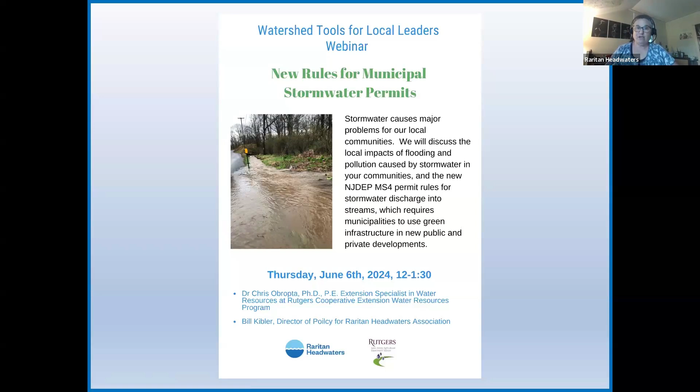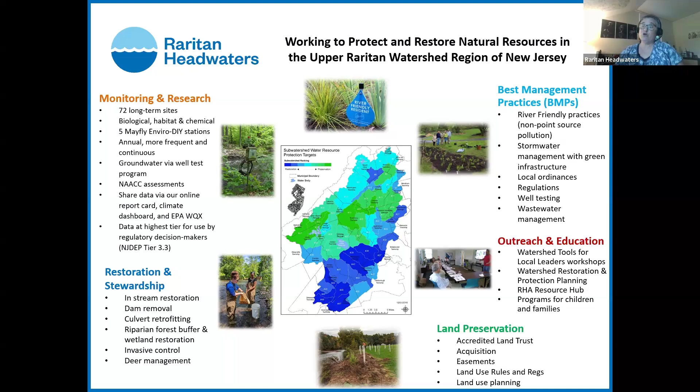My name is Tracy Gordon, Outreach Coordinator and Science Program Associate here at Raritan Headwaters Association. RHA is a 501c3 nonprofit conservation organization. Since 1959, Raritan Headwaters has focused on one thing: clean, safe water for all. We engage citizens and decision makers in the protection of our watershed and beyond through our award-winning science and education programs, land preservation, and advocacy. We are the region's leading provider of water quality research, habitat restoration, and water protection services. We preserve and steward critical watershed lands. RHA plays a decidedly unique role as no other organization offers a similar scope of services focused primarily on the Raritan Headwaters watershed.

We do have an upcoming watershed tools for local leaders coming up in September. There's the information, I will be sending more out. Our watershed tools for local leaders provides practical guidance on scientific principles, government regulations, and funding sources for watershed protection. These seminars are offered to decision makers and other stakeholders for 38 municipalities and 3 counties within our watershed area. Our goal is to provide expert level knowledge, practical information, resources, and partnerships to assist local leaders and citizens alike to make informed decisions to protect and preserve our water resources.

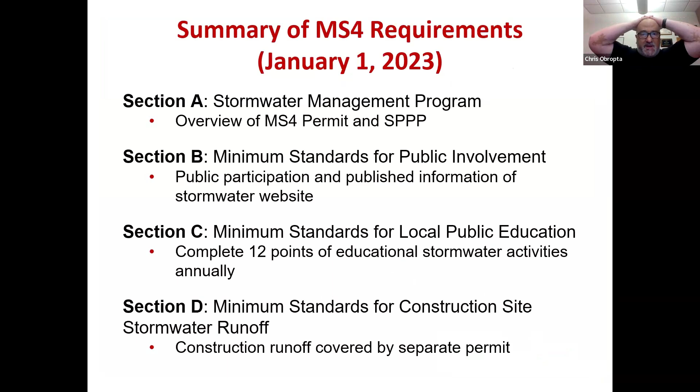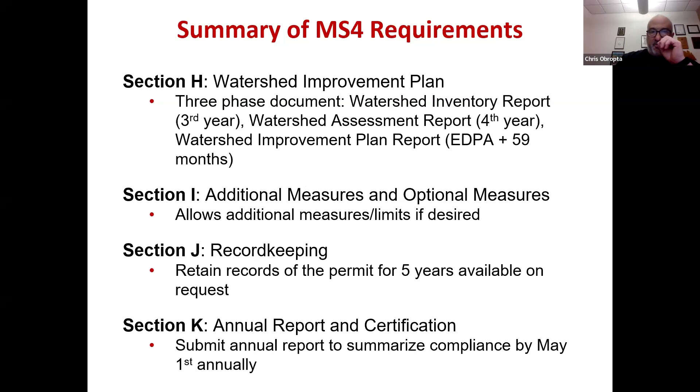So I'm going to go through the different sections of the permit. The permit came out January 1st, 2023. And we're going to march through each one of these briefly and talk about them. Some we'll spend a little bit more time on than others. And you can see, I'll probably just end at Section H, the Watershed Improvement Plan, which will be the last thing we'll talk about today.

So the whole idea with this is that every town in New Jersey has a permit for their MS4 system, and the MS4 system is the municipal separate storm sewer system, and that's where the four S's come from. And the idea is to really have a stormwater management program in a town that makes sure their systems are working properly as designed, that they're being maintained, and trying to remove as much pollution to the maximum extent practical as the systems were designed.

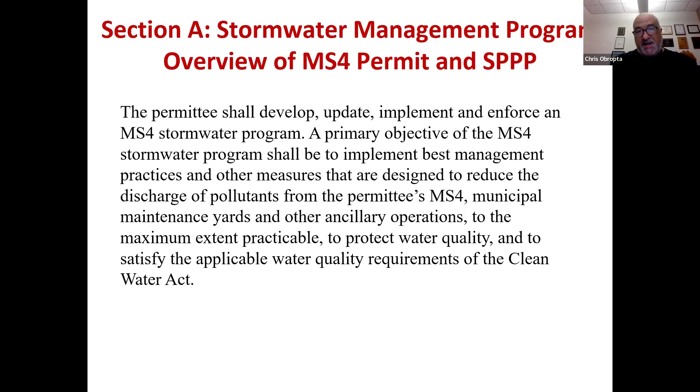There's a lot in here about the permittee. The permittee in this case is the township, the municipality, the city. One thing they have to do is develop this stormwater pollution prevention plan. What's nice about that is DEP has given a template for that. Basically it's about 25 pages, and they're just sheets where you fill information in the blanks and print it out. So it's not a huge lift. There's some work going into gathering the information you need for each of the sheets, but DEP's gone out of their way to lay this out for people and make it as easy as possible.

The town also needs to identify a stormwater program coordinator. It needs to let DEP know who that person is. That person needs to be specially trained. We'll talk about that later. But this is the person who's in charge of the MS4 permitting program in the town. They're going to be the person who files the annual report to DEP. And when DEP has questions about the program, this is going to be the first point of contact that they go to.

Okay. The other piece of this is that they want to make sure that this MS4 stormwater program that's being created and the stormwater pollution prevention plan are consistent with the municipal stormwater management plan. So that means you have to update your municipal stormwater management plan. And they want your municipal stormwater management plan also to be a component of the municipal master plan. And finally, they want to make sure that you update all your ordinances to reflect these new requirements given out as part of the MS4 permit, and that includes your stormwater control ordinance. We'll talk a little bit about that.

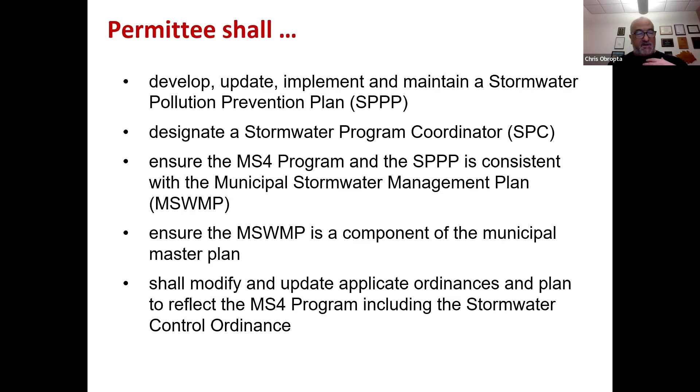Now, where I say permittee shall do all these things, it's not optional. This is a permit. Your town has a permit. You don't do these things, you could be subject to an enforcement action by New Jersey DEP. I just got off the phone yesterday with an attorney for Atlantic City, asking me if I could do some stormwater training for them, because they're in the midst of trying to resolve an enforcement action that was placed against them because they weren't complying with their MS4 permit. So the state and EPA are going after people. But DEP really wants people to try to comply and is trying to help people all along the way to do that. And of course, Rutgers is here, and Raritan Headwaters Association is here to help you too.

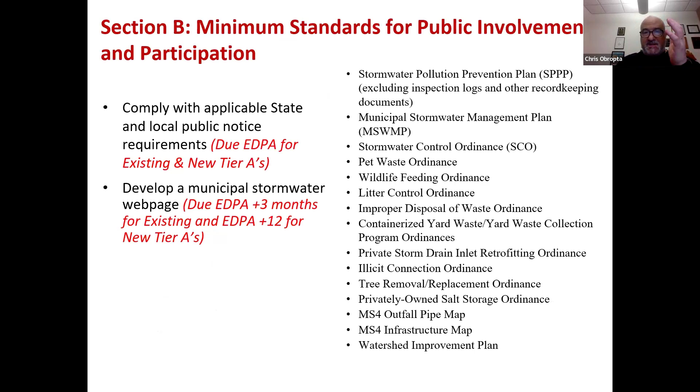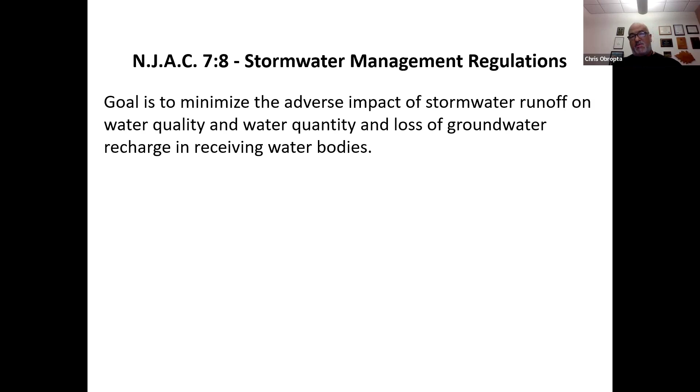So this is the stormwater management regulations that DEP passed and then passed again, and then just issued another revision to that last year. And the whole idea is the goal is to reduce the impact of stormwater runoff on water quality, quantity, and the loss of groundwater recharge. So 3 components are here: quality, quantity, and groundwater recharge, all important components. These apply to major development that disturbs more than 1 acre or increases impervious cover by 1/4 acre.

Now, you as a municipality, when you write your stormwater control ordinance, which is where all this stuff will go into, you can change this. You can make major development 1/2 acre and 1/8 of an acre. You change whatever you want, as long as you don't increase it. It's got to be at least as stringent as New Jersey DEP. There's other groups that have added a definition for minor development. So anything that disturbs less than 1 acre or adds less than 1/4 acre of impervious coverage still has to do some level of stormwater management.

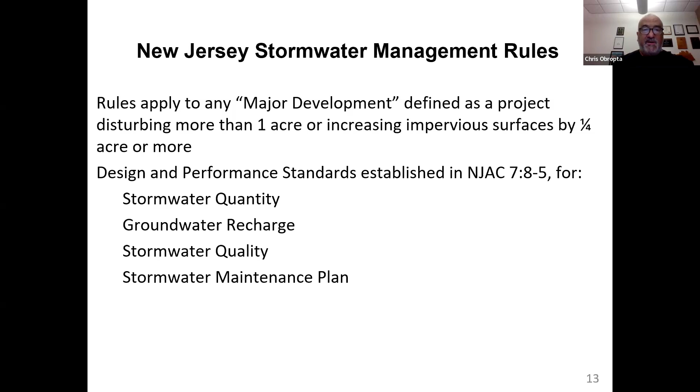So I believe the Watershed Institute has a draft of an enhanced stormwater control ordinance that would allow you to take into account major and minor development. So if you're in an area that has a lot of homes already built, there's not a lot of new development going in, but there's a lot of additions going on, a lot of rebuilds going on, you may want to think about adding that minor development component to your stormwater control ordinance.

So here's the requirements: water quantity, the same thing we've always done. Look at the 2, the 10, the 100-year storm, and try to reduce the amount of runoff that's coming from those storms as far as the quickness of the runoff, the peak flow of the runoff. The chance of getting a 2-year storm is 1 in 2 this year. It's a 50% chance. The 10-year storm is 1 in 10, and the chance of getting a 100-year storm is 1 in 100. Okay, so that's what those numbers represent. And they have different values for different counties, and I'll show that to you in a second.

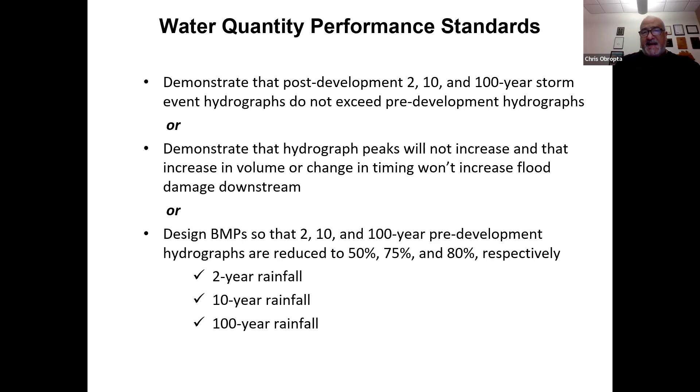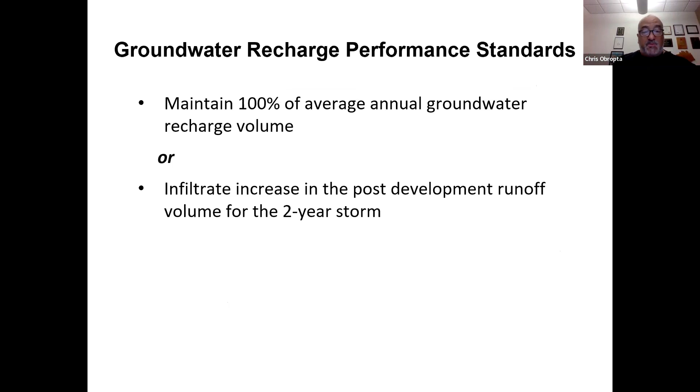Groundwater recharge, you have to maintain 100% of your annual average groundwater recharge. So basically, if you have 50 acres of wooded land or agricultural land you're turning into homes, if it was recharging 1 million gallons of stormwater a year, after you put the homes up, you have to be recharging 1 million gallons of stormwater a year. So not that hard, not that complicated. New Jersey gets about 50% of its water from groundwater, so we want to make sure we recharge those aquifers wherever we can.

And then finally, quality is the issue. They want you to install a BMP, or it's called a best management practice, to reduce at least 80% of the sediment, the total suspended solids that's coming off. And then also make sure that those are built in a way to also remove nutrients to the maximum extent feasible, so phosphorus and nitrogen. And why do we want to do that? Well, phosphorus, when it gets in fresh water, makes algae grow.

becomes a limiting nutrient. And when the algae grows, it really starts to cause these harmful algal blooms, among other things that are very detrimental to water quality.

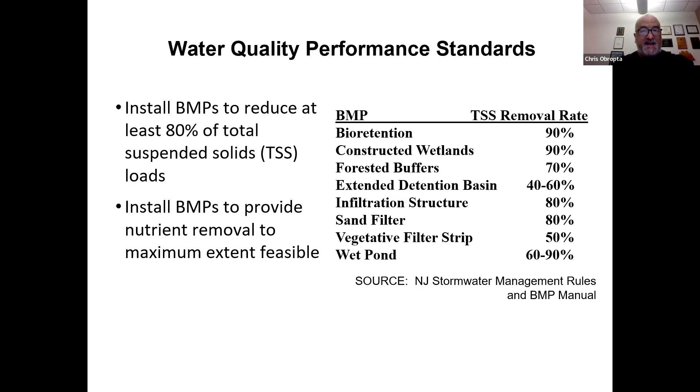On the right-hand side is a table that DEP has for different management practices and how much removal rates they get. But that's only if you build it in accordance with the best management practice manual. So if you want to get 90% removal for bioretention, you have to design it and build it in accordance with this manual. Okay, this is the only time this manual is part of the requirements, is if you're building a stormwater management practice to get a certain total suspended solids reduction, then you have to design in accordance with the manual, so it becomes really part of the regulations.

They did revisions in 2019 to this, and the revisions were basically removing the non-structural stormwater management strategies component and kind of replacing it with green infrastructure. So now, instead of building that big basin at the bottom of the hill, you have to build smaller green infrastructure practices throughout the entire development to better manage stormwater and capture water where it lands as opposed to where it runs off to.

And then the other thing they did was they said, we just really want to focus the quality piece on motor vehicle surfaces. Now, some of us disagree with this. We believe that it should be all impervious surfaces, but DEP thinks motor vehicle surface is the only thing that's important here, so that's why they changed the rule.

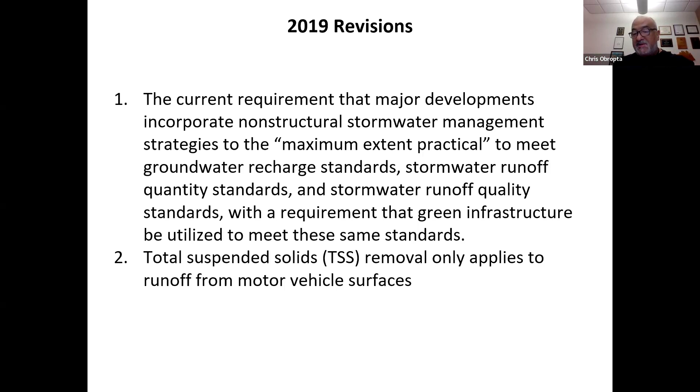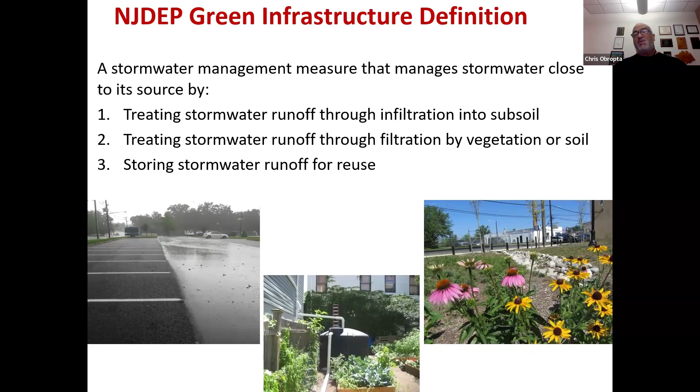So green infrastructure, there's a definition that DEP has here, and the way I refer to it is that we're putting smaller practices in closer to where the water lands, so at the end of the downspout, right near the road, so the rainwater doesn't have a chance to become stormwater runoff, pick up pollution, and carry it downhill to where we would normally put our big detention basin. So these green infrastructure practices filter water with soil, vegetation, or they store water for reuse.

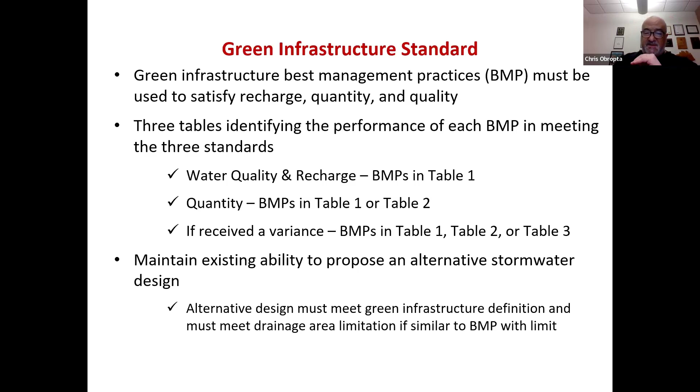DEP has these tables in there, and these are very important if there's development going in your town, and they have to address water quality and groundwater recharge as required by the regulations. They can only use the management practices that are in table 1. They can use the ones in table 2 if they want to deal with quantity. And there's a table 3 that they can use those practices, but only if they get a variance. And it's rather difficult to get a variance based on the way the permit is written.

Okay, so these are the tables that we have here, and you can see the practices on the left, and then it tells how much TSS is being removed, or total suspended solids. Can you use it to satisfy the quantity requirement? Yes and no's. Can you use it to satisfy the recharge requirement? And then there's some characteristics on the right of seasonal high water table.

So for example, bioretention will get a 90% removal if you have 2 feet between the bottom of the system and the seasonal high water table. If you have 2 feet, it also will allow you to recharge the water into the ground. If you only have 1 foot, then you can't use this system as a recharge system. Okay, so that's kind of how that works out. And you can see all the different ones here. We'll talk a little bit more about this in a second. I just kind of mentioned this too.

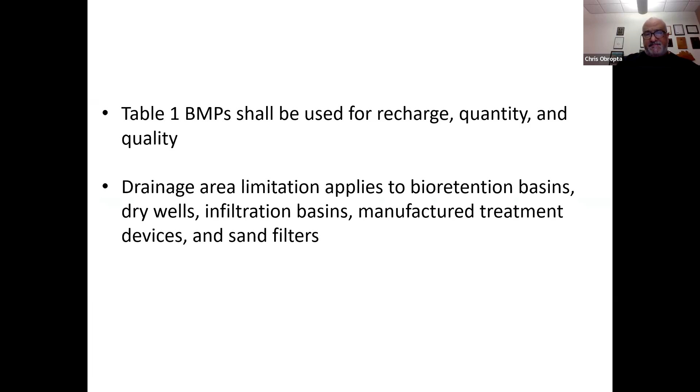There are drainage area limits on all this stuff. So, for example, if you're going to put a bioretention system in, the largest drainage area you can have is 2.5 acres. So if you have a 25-acre site, you're going to need 10 of these systems scattered throughout the site to be able to treat the entire site. So that's the kind of new requirement.

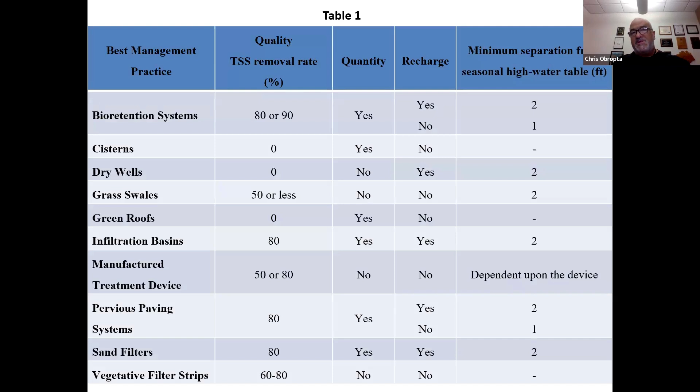That becomes very difficult for a lot of developers, and now they have to really think about stormwater management up front. Before, it was usually an afterthought once they put the development where they wanted, and they squeezed stormwater management in. Now it really has to be something that's thought about up front. Table 2, this is more for quantity. Okay, it does groundwater recharge too, but these are some of the same systems that we saw in the first table.

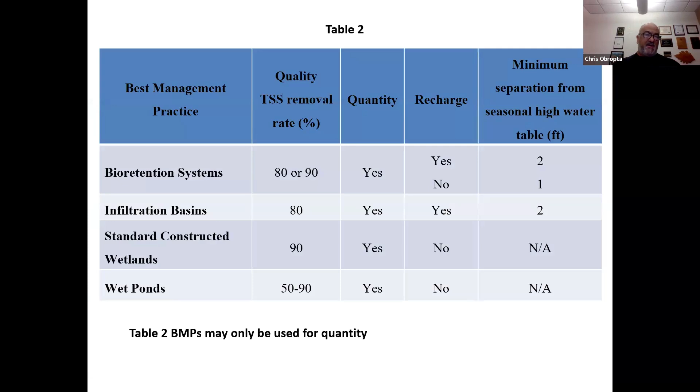There's a thing in here called constructed wetlands. A lot of people don't want to do constructed wetlands because they believe that once they build that, it acts as a regular wetland, and they have to put a buffer on it. So if they wanted to add future development, they may be limited because of their stormwater feature being built as a wetland.

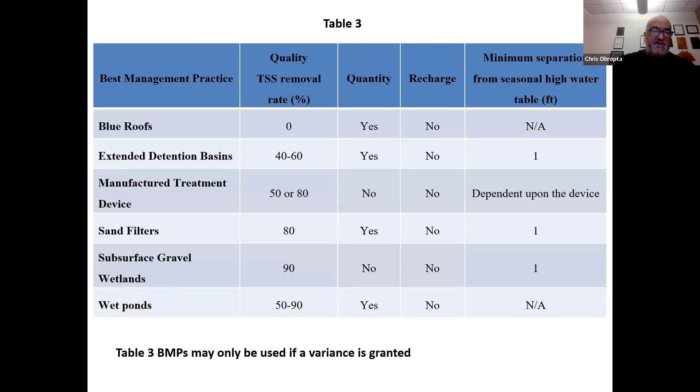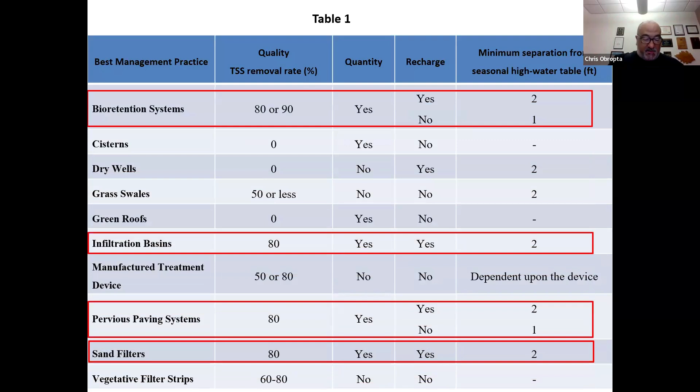This is table 3, which is more traditional things we used to use, and once again you need to get a variance to use the stuff in this table. So the practicality of this is there are 4 systems you can use to get water quantity, water quality, and groundwater recharge.

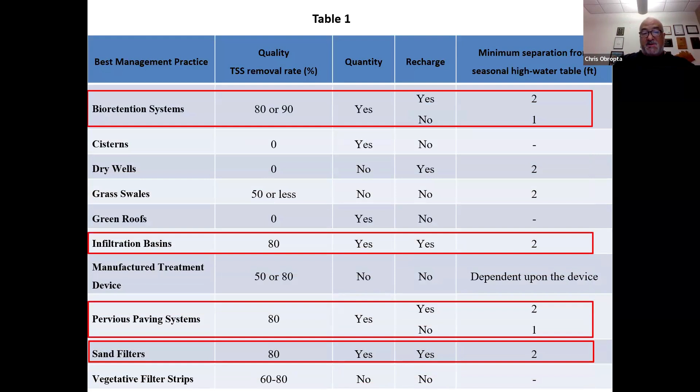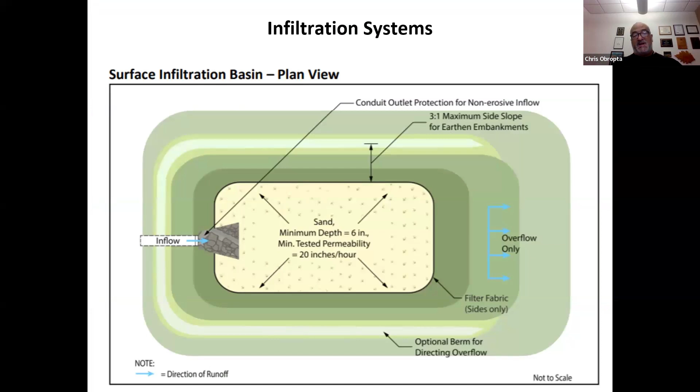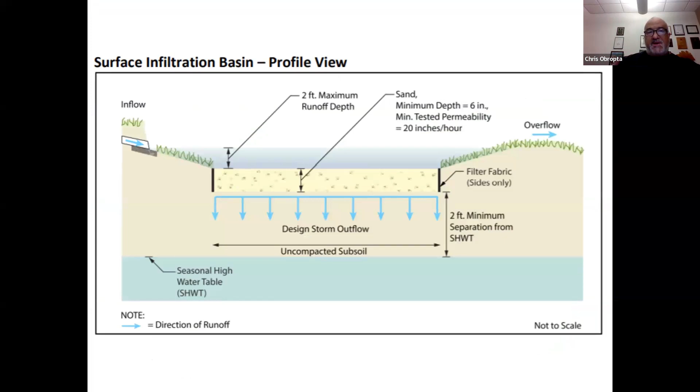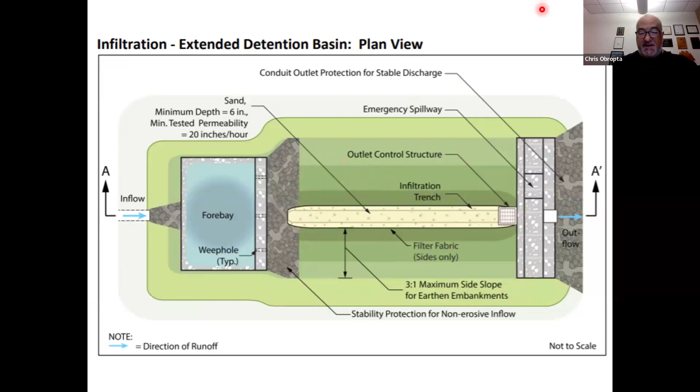So the middle piece here, let me get my laser pointer on it, will do the groundwater recharge and treat for water quality. When the water rises up, it fills the rest of this area, and now you have water quantity being treated as well. This shows a little bit of water for the water quality design storm, and bigger storms get deeper and deeper. A nice system to use.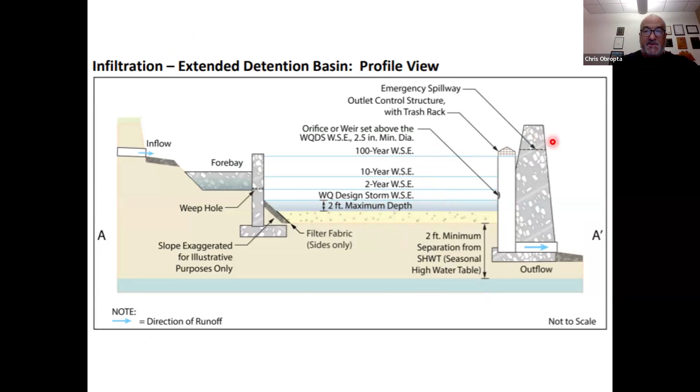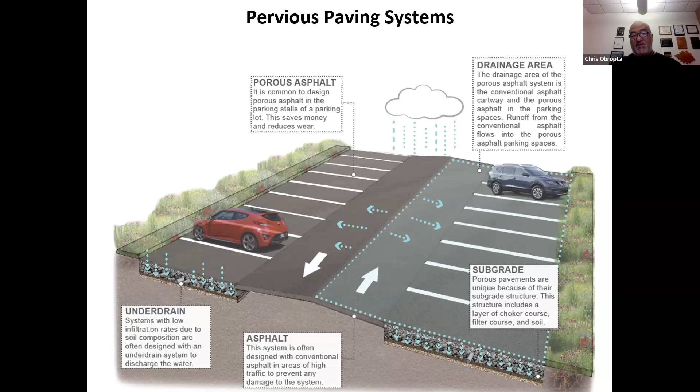Pervious pavement systems, very good. Porous asphalt is the most common one. The water passes right through the asphalt, goes into the stone layer below it, and slowly percolates into the ground. This stone has no fine material, it's clean stone, with a porosity of about 40%. So for every 2.5 gallons of stone, you can store a gallon of water.

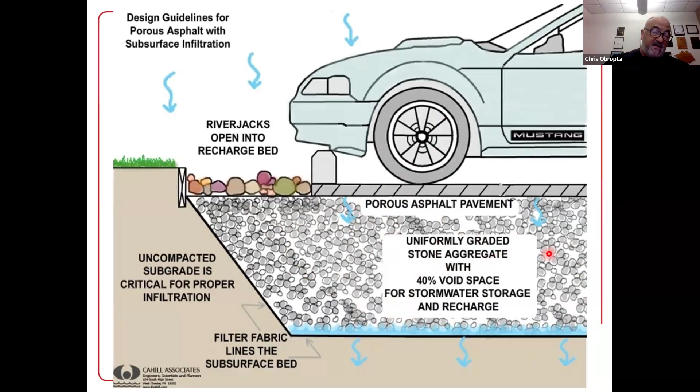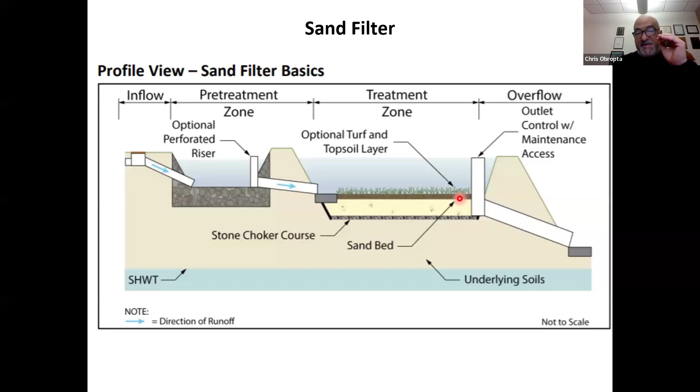This is a really nice system you can use, and now you have your stormwater management system under the parking lot, so maybe you save some land for other development. Here's a sand filter, same thing as the infiltration basin, but it shows topsoil and turf grass on top. Water goes in here and filters through the sand bed, then makes its way out.

Same kind of thing here, and you could see the water quality storm, and then you could design it with an under drain system too if you can't get infiltration. Maybe you don't need groundwater recharge because your site was already all clay and wasn't recharging any groundwater before.

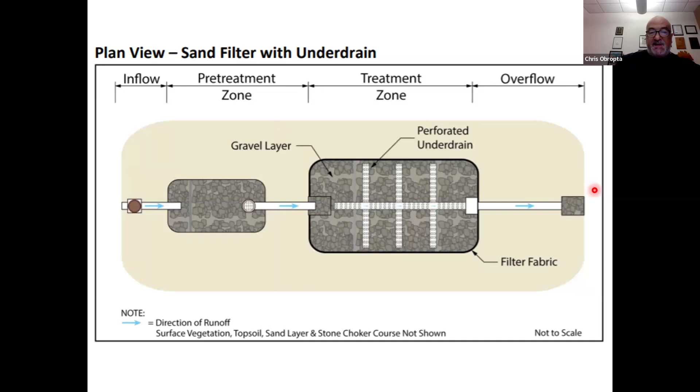Remember, you have to maintain 100% of your annual average groundwater recharge. If you go to a 50-acre site that has a lot of clay and there's no groundwater recharge now, the groundwater recharge is 0, then after you develop it can be 0. You don't have to recharge anything. So sometimes you can get out of doing that groundwater recharge requirement depending on how bad your soils are in the area.

DEP came up with these stormwater management rules under the Flood Hazard Control Act, passed last July. What they did was actually get Cornell to do a climate change model, and they projected how much the 2-year, 10-year, and 100-year storms would increase by the year 2100. They want you to design for this.

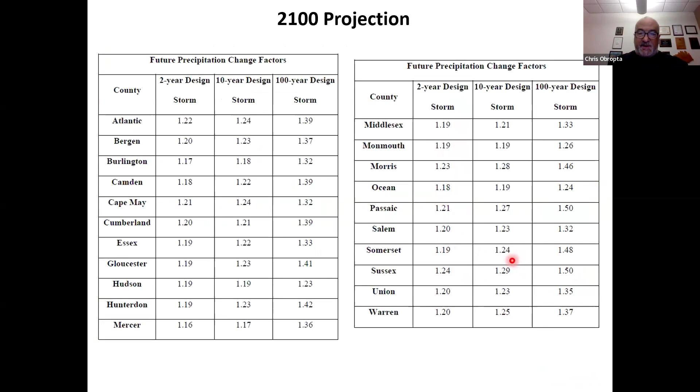I'm in Somerset County, so you can see the 2-year storm increases by 19%, the 10-year by 24%, and the 100-year storm by 48%. They also extrapolated storms we're using now, which are based on data through 1999, out to 2020 with real data, increasing those storm events too. The 2-year storm didn't change in Somerset County, but the 10-year went up 3%, and the 100-year went up 9%. So up to a few months ago, what we were designing for the 100-year storm was 9% smaller than it should have been.

The storm was bigger than we were designing for, but now these regulations require you to do that.

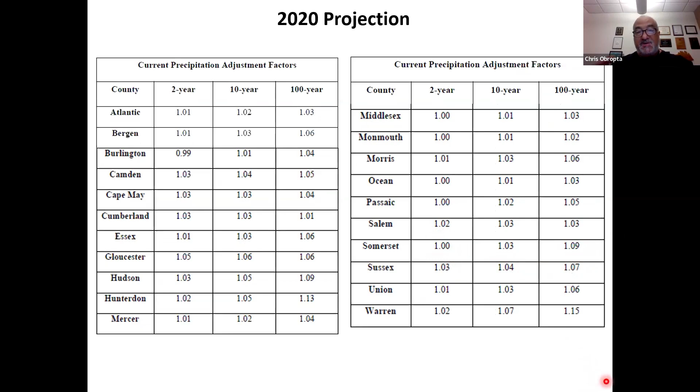So there's a section in here, and this is probably the most complex section of the regulations of the permit, section F. This is kind of pollution prevention, good housekeeping standards. So this is a section that requires all towns to adopt these ordinances. So you have to pass these ordinances.

DEP has a sample of these ordinances on their website. You can get them from ANJEC, you can get them from the Watershed Institute, I believe, too. The new ordinances that came out are privately owned salt storage and tree removal and replacement ordinances. So those have to be passed.

The private owner salt storage, basically, if you're a corporate center and you got a mound of salt in your parking lot in the winter, it's got to be covered and treated properly so it doesn't wash off. And the tree removal and replacement ordinance requires that if trees are cut down on public or private property, they have to be replaced at a certain rate. So there's sample ordinances for that.

There's also community-wide measures, such as street sweeping. So any road that has an inlet on it and curbing has to be swept - an inlet on the road has to be swept 3 times a year. If you don't have any inlets on the road, it has to be swept once a year.

Now, I'm going to tell you right now, that's not enough to keep the rivers clean. It should be more, but this is the minimum requirement that DEP has.

Storm drain labeling and retrofitting, herbicide management, basically don't apply herbicide near the storm drains. De-icing material, they want you to remove it within 72 hours after the storm from the roadways. Roadside vegetated waste management, so proper disposal of that, and then roadside erosion control.

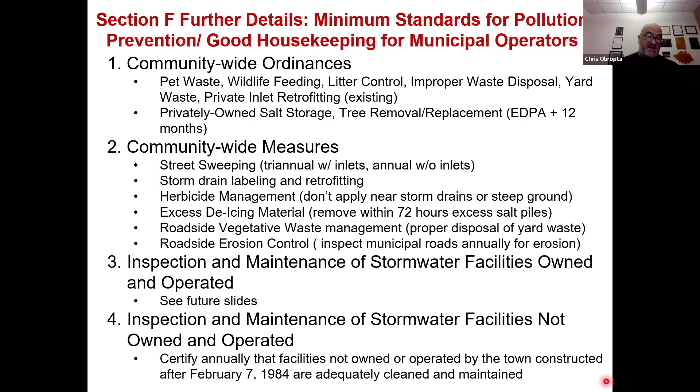Inspection and maintenance of stormwater facilities that are owned and operated by the town. That's kind of a big part of this. So all the detention basins that the town owns have to be inspected regularly. And number 4 is all the detention basins that are privately owned have to also be inspected. We'll talk a little bit more about that in a minute.

They have a lot on maintenance yards, and I'll go through some of that. And there's a lot here on training. So we'll go through some of these.

So the inspection and maintenance stuff that we're required to do - you're required to inspect your storm drain inlets and clean them and maintain them. So the inlet is just a grate on top of the catch basin. The catch basin is the box beneath it. I think I have a picture of it here. So this is the inlet, and this is the catch basin.

Okay, so we have to inspect those and clean those on a regular basis. Your MS4 conveyance system has to be inspected and cleaned. So that's the piping that connects those catch basins. So this is not a trivial thing if you have to go and inspect all these.

So I think a lot of people, when they're inspecting these basins and they find that they have to be cleaned out, they also inspect the inlet and outlet pipe to make sure that they're flowing freely. And that's probably enough to satisfy this requirement, because they're very vague in the permit about this requirement.

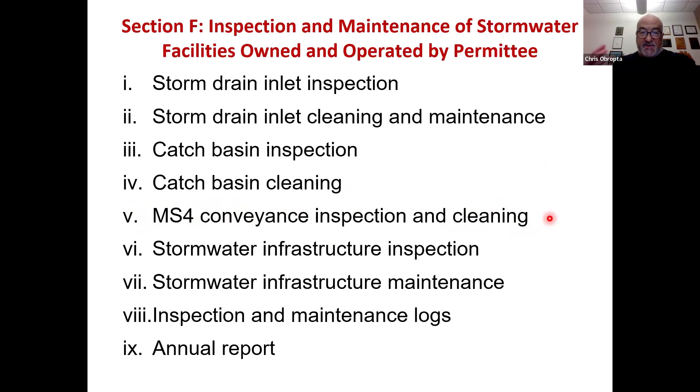Stormwater infrastructure inspection and maintenance, and then there's maintenance logs and reports that have to be done. So these are just basic definitions that we have. And here's some of the requirements.

The inlet has to be inspected once per year. So that's the grate on the surface. Now, if you're street sweeping a road once a year or 3 times a year, while you're street sweeping, you could also be visually inspecting that. So that might be okay - get away with that way.

Catch basins have to be cleaned once every 5 years. Inspected once every 5 years and cleaned if necessary. So what's if necessary? Well, if a third of the basin is filled with sediment, it's got to be cleaned.

Now, some basins may need to be cleaned once every 5 years. As you're going through and inspecting your stormwater system, you may realize that there's a series of basins that have to be cleaned annually or maybe twice a year because of leaf collection in the basins.

Inspecting, conveying your conveyance system - we talked a little bit about that.

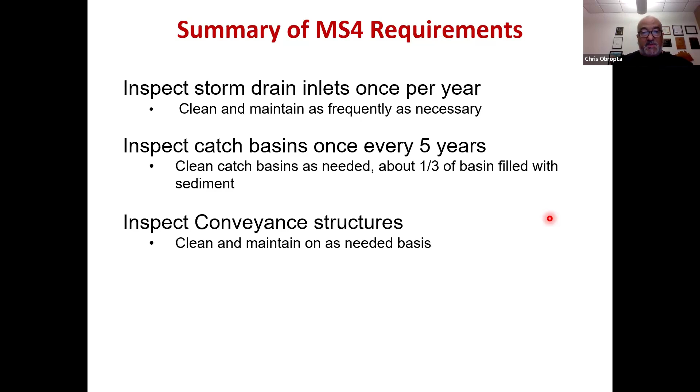Now, the stormwater infrastructure: detention basins and retention basins. The difference is a detention basin goes dry between storms - it's one of those grass basins that gets mowed every week usually. A retention basin is basically called a wet pond, so when it rains, the stormwater gets stored on top of the surface of the water. That's how it provides stormwater management. But both of these are stormwater infrastructure, and they have to be inspected in accordance with their approved maintenance manual.

My experience is that most of the stormwater infrastructure, the detention basins in town, do not have approved maintenance plans. If you don't have an approved maintenance plan, you have to inspect at least 4 times a year, and after each storm exceeding 1 inch of rainfall. This is crazy, this is a lot of work. So my suggestion is, if you have a detention basin or retention basin that doesn't have a maintenance plan, write one, and in that plan identify that it needs to be inspected only once a year, annually. That would help you out a lot.

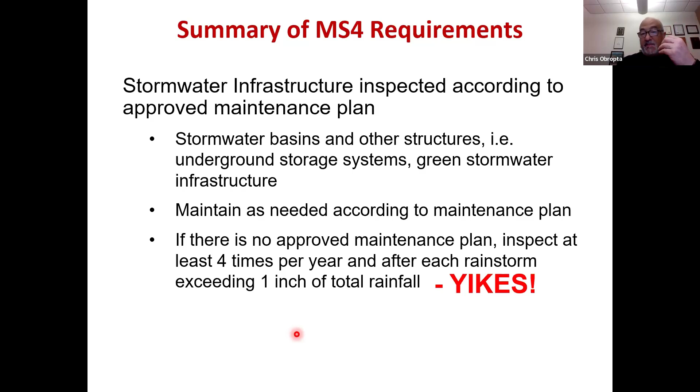The other piece of this is that there's a lot of basins owned by homeowners associations. How do we manage that? Well, the town is required to make sure their basins are functioning properly. One way the town does that is by passing an ordinance requiring any private property owner who owns stormwater infrastructure to provide an annual report to the town saying it's working properly and has been inspected. Now, my experience is that towns pass those ordinances and sometimes only get 30 to 50% compliance with that.

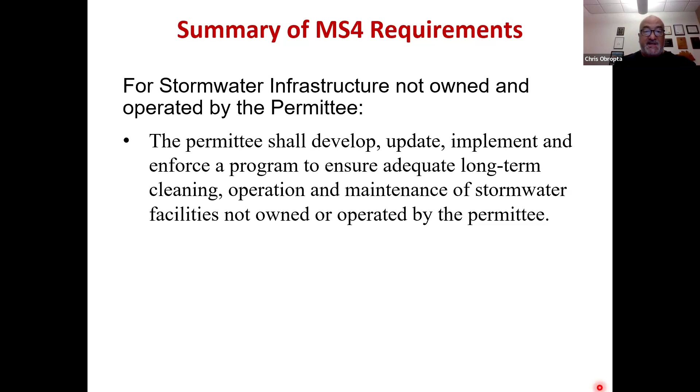But there's an opportunity to go back and have fines on top of that if you have to. If a homeowner association detention basin isn't working properly and causes problems, it's not going to be on them - it's going to be on the town, because in the town's permit it says you have to make sure all these systems are functioning properly. So once again, it falls on the town to ensure that's happening.

And then you've got to log all these activities. This is the biggest problem with this stuff - the public works guys are doing all this cool work, but they're not documenting it. So come May, when they have to file their annual report, the stormwater coordinator doesn't have enough information to file the report. So you really have to document everything that's happening.

We have to make those maintenance and repairs within 90 days. We'll talk a little bit about the outfalls in a minute - some of these repairs may take a lot longer. And then you have to certify in your report that all this has been done. That annual report you fill out in May also certifies that any major development built in your town is in compliance with the stormwater management regulations.

In other words, if you let a 50-home subdivision go into your town and say, oh, you don't need to worry about groundwater recharge, when they really did, then ultimately the town is going to be liable because they're in violation of their MS4 permit. And we saw this in a town in Mercer County - they let development go in.

It wasn't properly designed to satisfy stormwater regulations, and the town had to come in later and spend $450,000 of taxpayer dollars to fix that development, because the developer already got his bond back - he was already gone. So it was on the town's responsibility to fix that. Nobody wants their tax dollars going to pay to fix development that should have been built properly in the first place. So you've got to keep on top of this.

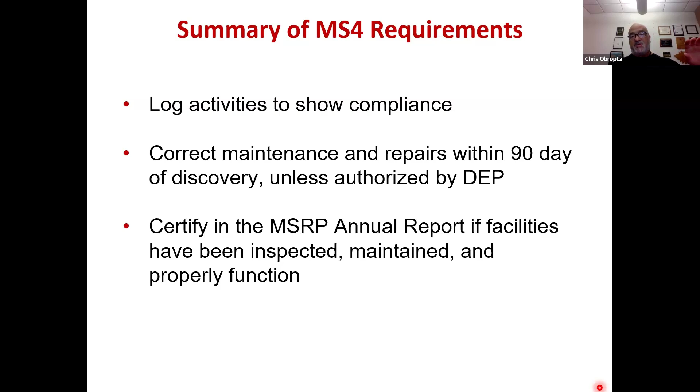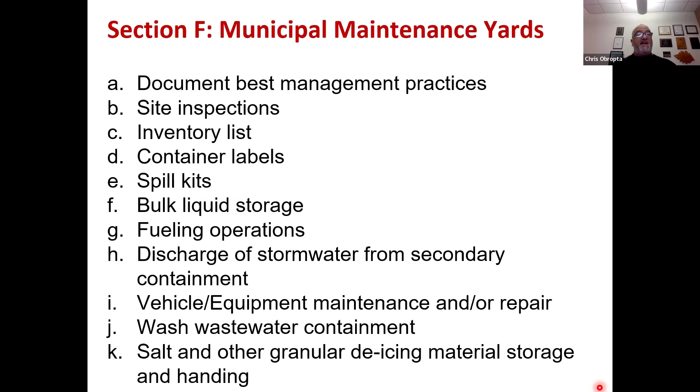Okay, maintenance yards are insane. This is a whole list of things that DEP wants you to do. I was just going to show you the titles of the different items: documenting the best management practices in the yard, having spill kits in the yard, having standard operating procedures for fuel operations, vehicle wash water containment, salt and other granular de-icing material storage and handling, and it goes on - aggregate materials, cold patch, street sweeping stuff. All this stuff has to get done by the maintenance yards.

The public works director needs to be aware of this. He needs to be able to have a checklist and go through this and do a regular inspection of his yard to make sure he's in compliance. A lot of times you're not going to be in compliance, but if you're not, then you're going to write up a little plan of how you're going to get in compliance. Usually that's enough to get you out of trouble with New Jersey DEP - that you have a strategy for coming into compliance. So that's very, very important.

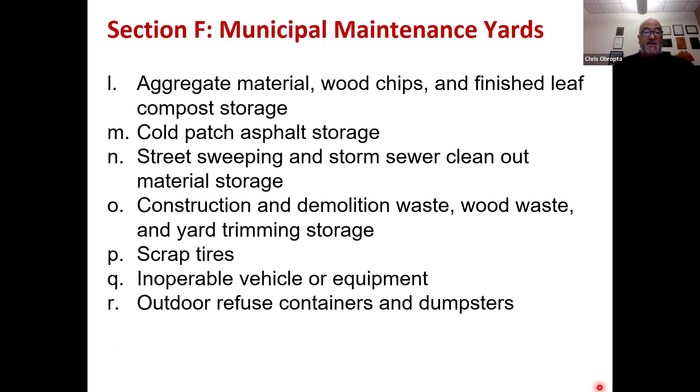Stormwater training: the stormwater program coordinator, the person in charge of the permit, has to be trained once per permit cycle - so once every 5 years, since the permit cycle is 5 years. Then there's annual employee training, and it's supposed to cover all this stuff - what's in the stormwater pollution prevention plan, what are your community-wide ordinances and measures. So all this stuff is supposed to be covered in that training.

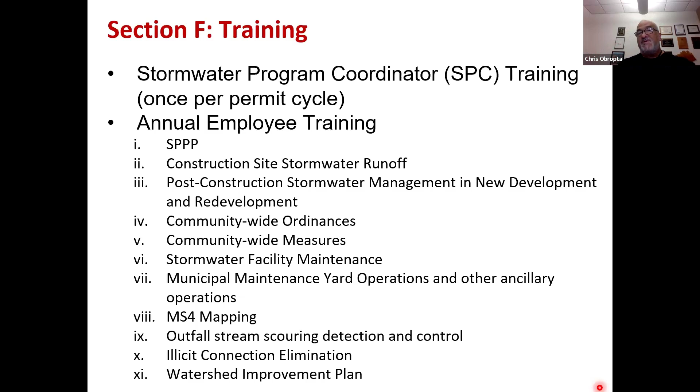When you do these trainings, you have to document who was there and who did the training. It's a great idea to get a copy of the PowerPoint presentation. Some of this stuff may be done online, so if you're using an online system where staff are watching a video, you need to find a way to document that and reference where that video is and what video it was, to make sure it complies with these requirements.

There's also a stormwater management design review training. The town engineer who is reviewing plans has to be trained, once per permit cycle. Most of these guys have done this already and are good at that, but it's important, if you're the stormwater coordinator, to make sure your township engineer has been trained - have a copy of the training certificate with the date he took the class.

That's very important. Stormwater management rule amendments - DEP is constantly changing the stormwater management regulations. Whenever they change regulations, you have to do a whole other training, usually for the municipal body. Then there's municipal board and governing body training. There's a video we had done a while ago, asking the right questions, and usually we just ask the board members to watch that.

That has to be done once per every term. So in November, there'll be new mayors and new council members and township committee members, and they should take this training.

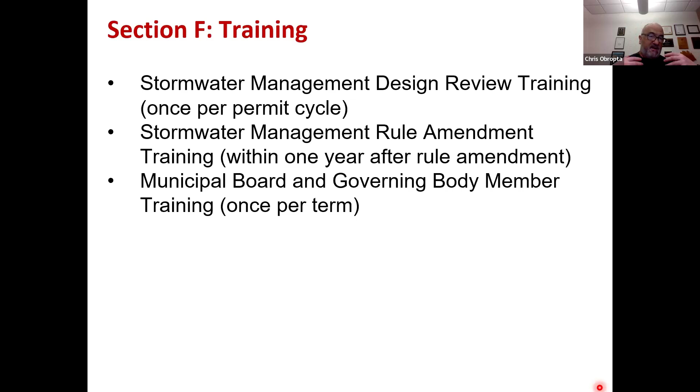Section G is all about mapping, scouring, and illegal connections - these are all things that have to be mapped. Mapping the outfalls isn't that hard, it's pretty easy to do. But you not only have to map the outfall - eventually, when you do the watershed improvement plan, you're going to have to determine the drainage area of the outfall: how much land does that outfall drain, which land does it drain. That's very complicated and time consuming. We've done that for a town - it's not an easy thing to do.

Groundwater discharge points - are there any places where your stormwater system discharges to groundwater? Are there any interconnections between other towns? You have to have all your storm drain inlets mapped, the manholes mapped, the piping mapped, the pumping stations mapped, and the stormwater facilities mapped. And you have to show where your maintenance yard is - some towns may have multiple maintenance yards, and you have to show all of them in that mapping.

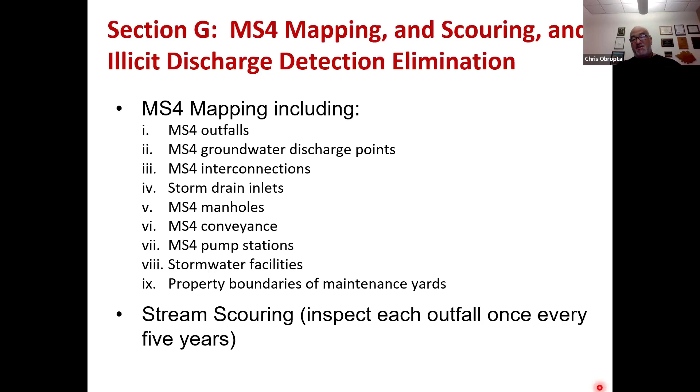There's stream scouring, that's a requirement - every outfall that goes to a stream must be inspected at least once every 5 years. If you find that there's scouring occurring and there's problems with that, it has to be repaired, and you have a year to make those repairs. I'll talk a little bit about that in a second.

The last piece here is illegal connections. When you're inspecting your outfalls, you want to do it during dry weather - in other words, it hasn't rained in 3 days. Because if it hasn't rained in 3 days and the outfall is flowing, it could be an illicit connection - it could be a wastewater line hooked up to it. In most cases, groundwater is just seeping into the pipe, but there's a protocol to go back and test those outfalls that are flowing after 3 days of dry weather to make sure they're not an illegal connection.

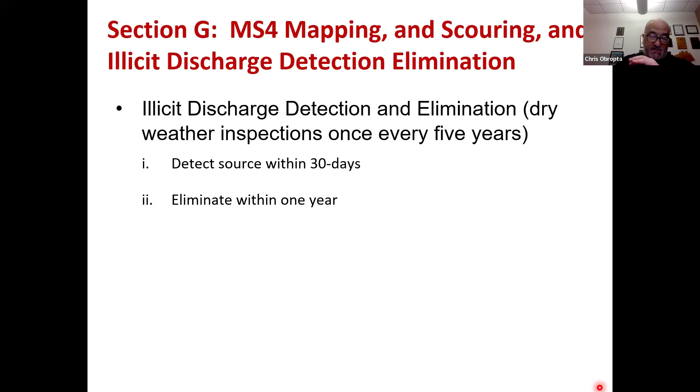When you detect one, you have to fix it right away. Actually, you have a year to fix it. So if you test and find out there are pathogens in there, somebody's sanitary line hooked up to that storm system, you have 30 days to figure out where it is, and a year to fix it, to remediate it.

So the stormwater outfalls are interesting, and how to fix a scour with that. There are a lot of different ways to do that, but most of this involves working in the stream, and most of this stuff costs a lot of money.

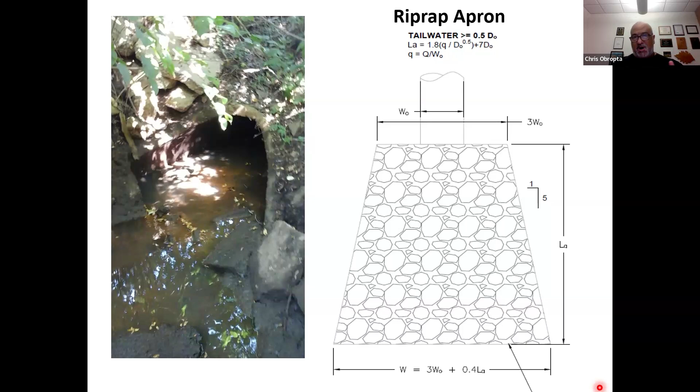So the question becomes, okay, if I identify an outfall going to, say, the North Branch of the Raritan River, and it's causing massive stream bank erosion, I want to go in and armor it. Either use a riprap apron like shown here, or a scour hole, or put in stone like this riprap channel, or maybe gabions to step it down the hill. Either way, I'm working within the stream corridor.

I need to get a permit for that. It takes 90 days to get a permit. But not only that, you're talking about a lot of stone, a lot of construction. You may not have this money in your budget.

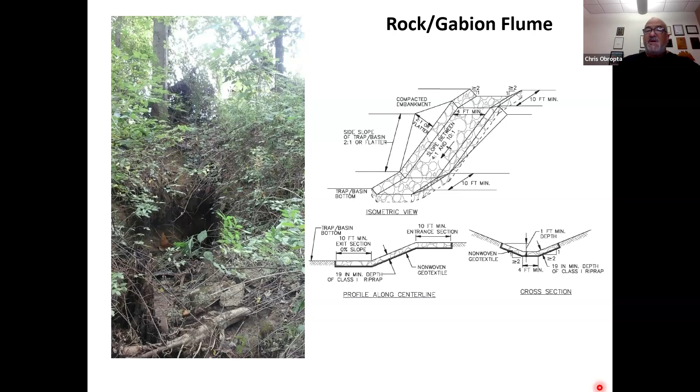So one issue is that you have a year to fix this, or you have to notify DEP of your plan to fix it beyond that one year. In other words, hey, we found this problem, we figure we're going to have to armor this section around the outfall, but we don't have any money in our capital budget this year, so we're going to push it off to next year. That's a legitimate excuse for not doing this, but you need to have a plan to move forward. You can't just ignore it.

Okay, so the last piece of this is the watershed improvement plan, and Tracy hinted at this earlier on. So many states throughout the nation have MS4 permits that require towns to retrofit existing development with stormwater management. In other words, most development in New Jersey was built before 2004, when the stormwater regulations were very good, so a lot of these developments have no stormwater management at all. One idea is to go in and retrofit stormwater management into those places, to treat those older developments, improve water quality, and also reduce flooding.

So that's what this watershed improvement plan is. The idea is you have to focus on streams that are impaired, since all our waterways are impaired in New Jersey, most of them. It's not a problem, but you have to know what the TMDL says.

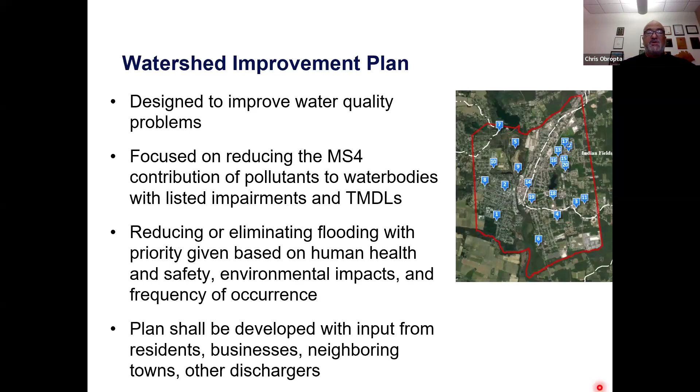TMDL is total maximum daily load. For example, the TMDL for the North Branch, South Branch, and Lamington River says you have to reduce total suspended solids and total phosphorus by 60 to 80%, depending on where you are. That would be your target when doing this. You don't want to just look at reducing pollution going to the waterway; you also want to hold the water back and figure out how to reduce some of the localized flooding.

Okay, so there are 3 plans you have to prepare. Now, the EDPA is the effective date of the permit, which was January 1st, 2023. So you have 3 years to do the inventory, that mapping we talked about, and part of that mapping is also delineating the drainage area of each outfall.

The second phase is the watershed assessment report, which is due a year later. And the last piece is the watershed improvement plan, which is due at the end of the 5-year permit cycle.

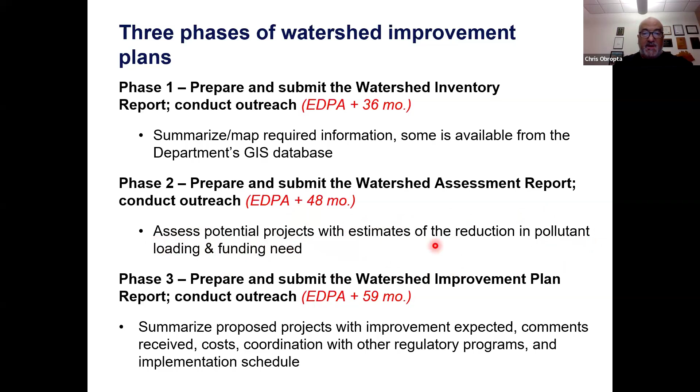Now, we are currently working with Raritan Headwaters and the New Jersey Water Supply Authority to do watershed restoration plans for the South Branch, North Branch, and Lamington River. In those plans, we're going to have a lot of watershed improvement projects identified, so we'll have a lot of this stuff identified for towns, and they can simply pluck that out of the plan and put it into a watershed improvement plan. We're trying to make it as simple as possible so they'll save a little money in the long run. Otherwise, this is going to cost an arm and a leg.

And that's it. 45 minutes, right? That's what I had, Bill. Is that correct?

Yeah, that was great, Chris. Thanks so much. I'm sorry I spoke so fast, but it's a hard topic. It is. It's a lot of information. There's a lot going on there. There's a lot of stuff going on.

Yeah. Well, but I think the important thing to know, like, so if you're in a town, if you're a mayor, or business administrator in a town, or public works guys, there's a lot of stuff here. And your township council and committee needs to know all the stuff you're being asked to do by DEP, because this is going to cost money.

And the place I see always gets cut is a DPW guy retires, and they say, well, we don't need to replace him. And so that's one less guy they have, but here now you're talking about street sweeping, catch basin cleaning. There's a lot of stuff going on here that has to happen. It's big expense.

And I tell you right now that the piece of property taxes that people pay aren't covering this at all. I mean, I got a friend who's the head of public works, and a woman always calls him and yells at him and says, hey, this ditch is clogged in front of my house. You got to come clean it out. What am I paying taxes for? And he tells her, you're not paying taxes for me to clean the ditch. You're paying taxes for the school down the road. I'll come clean a ditch out because that's my job. But I get about a nickel of your taxes. The rest goes to the schools.

And he's right. Most of the money goes to education, and that's what we're paying for, and fixing the roads. And not a lot of that money's going to stormwater management, but DEP's just dumped this permit on. And by the way, this didn't start with DEP. This started with EPA. This came out of Washington. So the whole MS4 permitting program started with EPA in DC and was handed down to the states to develop and implement.

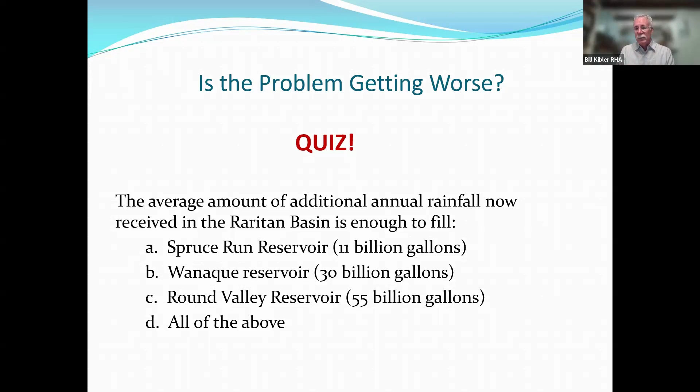99 billion gallons. That's enough to fill Round Valley, Wanaque Reservoir, and Spruce Run. And that's not total rain. That's just the additional amount of rain we get from what we got 60 years ago. So that impacts our communities. And, you know, Chris talked about some of those impacts. How do we deal with those?

Well, one way to deal with those is to consider forming a stormwater utility. Stormwater utilities aren't mandatory, they're optional. They can be formed at the municipal level. You can form them at the county level. You can form them at a regional level. So several municipalities could get together and partner on a stormwater utility.

The concept behind a stormwater utility is much like any other utility. It's like a wastewater utility in that it collects fees from the people who use that utility. And then that money can be used, in this case, to address those stormwater issues that you have in your municipality or your county or your region. This is a way to generate that money that you know you need to address these stormwater issues moving forward.

New Brunswick just recently, only last month, announced that they're creating a stormwater utility to address flooding downstream in the Raritan Basin. So this is one of our Raritan Basin neighbors. There are a number of other municipalities in the state that are either in the process of creating a stormwater utility or are at least doing the homework to determine whether a stormwater utility might be a good fit for them. I realize New Brunswick is a larger city than most of the folks in our watershed region, but they're in our neighborhood. They're in the Raritan Basin, so I kind of feel like that's instructive.